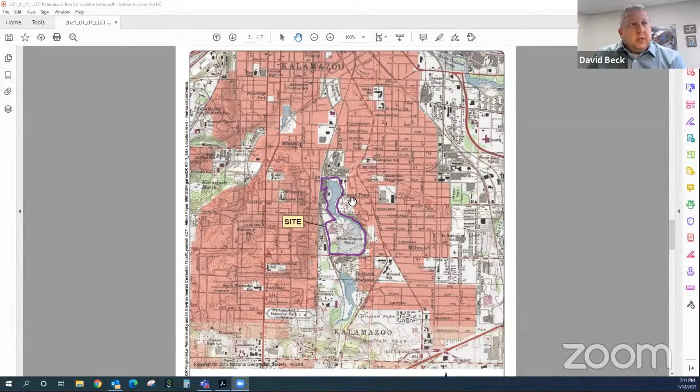So real quickly, the address that Anthony mentioned, 268 Alcott, is the old Allied paper site, just south of Alcott. There were other portions of Allied paper north of Alcott that I'm sure have been discussed in this committee before with the ongoing development on the north side. We're actually working at the old pond just south of Alcott and what's currently a landfill closer to Cork Street. This is the focus of our work area.

So I'll scroll down to the next drawing. As part of the design, we've submitted a few iterations of that to the various parties.

One of the comments we received from the city, since the city did acquire the former Panelyte site, which is outlined in orange here. The city acquired this, I believe, in 2018, maybe 2019, from the Michigan Land Bank. That acquisition was to facilitate the remedy on the property, and also for future use of the Panelyte property along with the Allied site once the remedy is complete. The expectation is that the site as a whole will be transferred to the city of Kalamazoo for their use in the future following the remedy.

As you can see, it's a large site. There's a lot to go over, but in general the project includes excavation of residual paper making materials, so paper residuals and some other soils impacted by related constituents, and those excavations will be completed in these black outline areas.

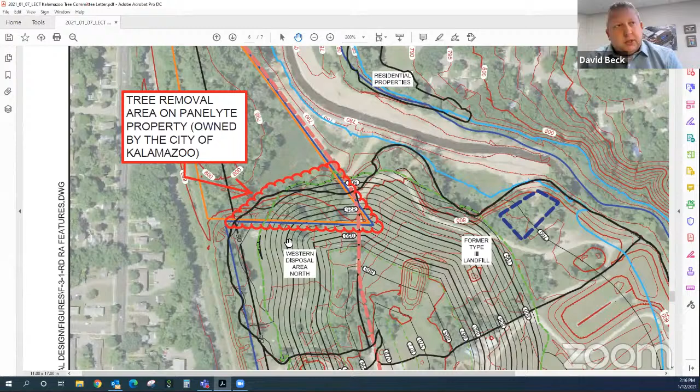We did have an arborist come out to do a tree survey, summarized in the letter. In general, they identified about 166 trees over that approximate 1 acre. Upon completion of the remedy in this area, it'll be a capped slope, which cannot accommodate trees, so it'll be revegetated with native grasses. But the project as a whole does include significant environmental restoration of the area.

I'll scroll on to the next drawing. This is the restoration plan submitted as part of the final remedial design to the agency and stakeholders in December. The most significant feature as part of the restoration is Portage Creek. Right now along Cork Street, Portage Creek is in a very narrow, steep channel, which is an urban stream at this point—it's not natural.

As part of the restoration, we're restoring Portage Creek to what more closely represents the original stream before the paper companies developed it in the late 1800s. We do have some historical documents showing the likely path of that creek was closer to this, and we've used some representative streams to identify proper meandering and such.

So as part of that, we're going to relocate this stream, which is going to help slow it down. It'll increase some storage, and you can see the dark blue area adjacent to the relocated stream - that'll be new floodplain.

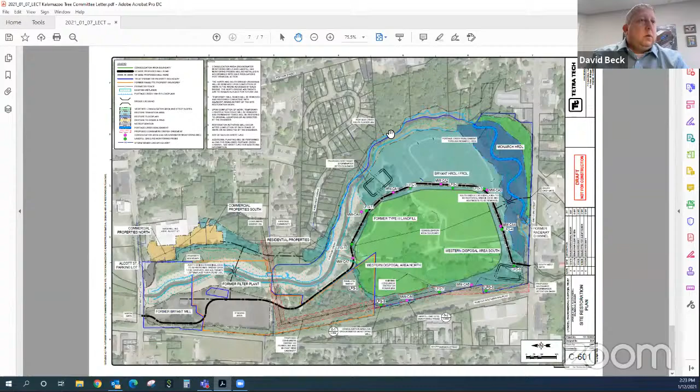The tree survey, correct? Yes, yeah. So here's that summary - by and large, it's mostly box elders that we've seen out there.

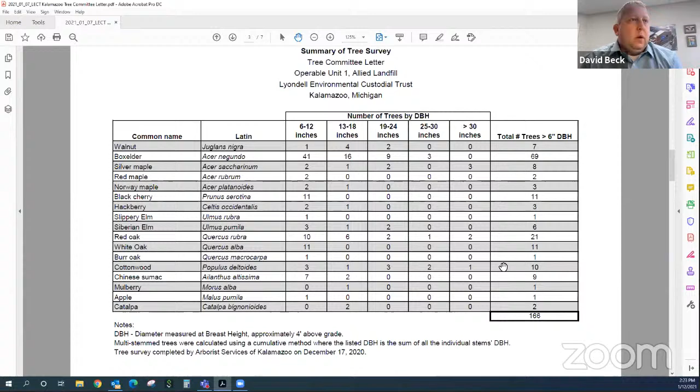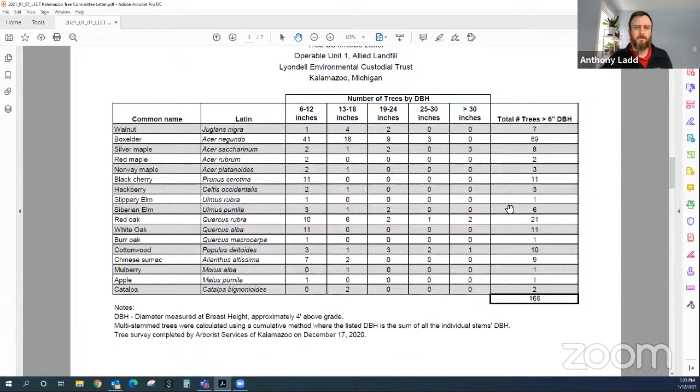And do you have any idea - I realize that's years away, but as far as the plans go, have there been any species named for the plantings by the creek? Yes, yep, right here, the following table.

Yeah, so this again is certainly subject to some change based on availability at that time. But given that these are floodplain plantings, that's going to narrow the list of what we can put in there, just because there will be essentially annual flooding of the area. So these are the expected trees we expect to put out there, and then the shrubs as well, which there'll certainly be far more of than trees.

Okay, any questions from the committee?

Do you expect the first tree removals to actually be filled with, like, the wood itself filled with heavy metals or whatever you guys are remediating?

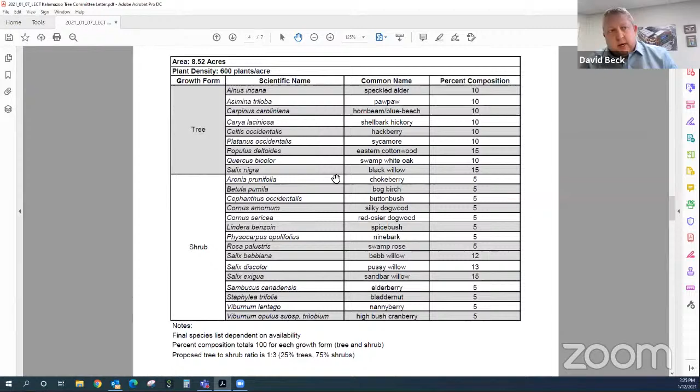So initially, in February, if approved, we're actually just going to have a tree service come out and fell the trees down to maybe about a foot above grade. They'll fell those and chip those. And then once mobilization happens in the spring and our earthwork contractor starts working in that area, they'll actually remove the stumps growing within the paper residuals. We expect those paper residuals are within the root systems of the trees.

So will those be treated as contaminated materials? Yes. Tree roots, stumps, all of the materials that come out of the excavation areas will go into the consolidation area.

Over time, does that consolidated area break down, or is it just there forever? It's there forever. It'll essentially be a repository of these materials indefinitely.

But from an aesthetic standpoint, with the cap and fill and grass, native grasses, it's not just a lone pile. No, it's going to be a large grass hill. That very well could be appealing as a sled hill in the future. Got to have snow to do that. Right.

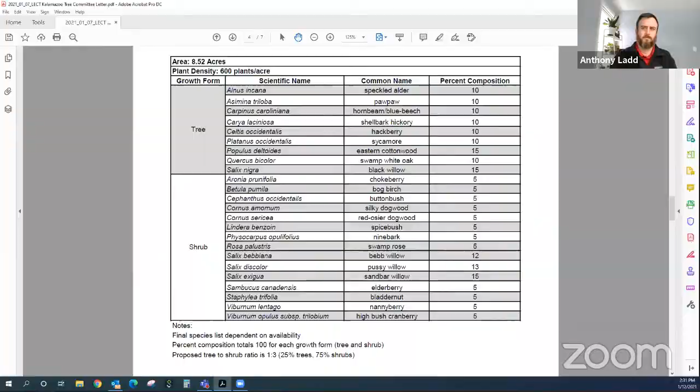Okay. So that will conclude all of our new business for today.

The remaining two items are two matters of old business. First being 400 Rose Phase 2, tree removals with AVB. This was an item that came to committee in December. There was a site plan that was presented to the site plan committee. We try to make sure that tree committee approval for any removals are part of that site plan.

So when that was presented to the site plan, was presented to the tree committee, I think we had some concerns and some comments. We wanted to take time to kind of look through this and reconvene. We did that. We had some suggestions that were made to AVB. And so now we're kind of picking this up again.

I think a couple of the requests that we had from last month were additional plantings off-site, knowing the limitations of green space that exist on the space adjacent. Some assurances for the health and well-being of the trees for an extended period of time. And then I think there were some adjustments to the species selection as well, based on a couple of the trees that were outlined.

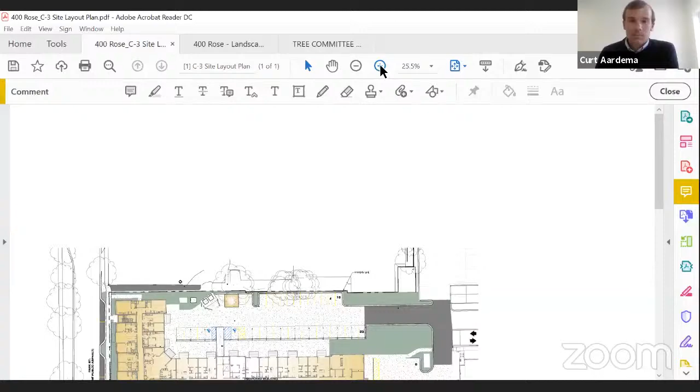So if I pull this up here and then bring this up here to the site plan, can everybody see the site plan there? Yes. Okay, great.

So as I mentioned, we've got an urban building design built out close to the street, sidewalk and street and sidewalk. We've got plantings noted here along the right of way that are intended to replace and add to what's proposed for removal. And then as we looked at the site, the surrounding area for locations to plant for additional trees, we found a couple of opportunities to the east.

So on the drawing here, it's off the edge of the drawing, but in this area, our company owns the former Knights of Columbus property, which has a couple opportunities there. And then we are going to plan to work with some of the neighbors here to the east on plantings on the south side of Cedar Street.

The north side on the east end of the block was already planted with new trees that we put in for the first building in the project, and then the one that was preserved at the corner of Rose and Cedar. And then we're looking at a few other areas on Rose Street as well to see if there's some pockets on the east side of Rose Street, which is pretty bare of trees right now.

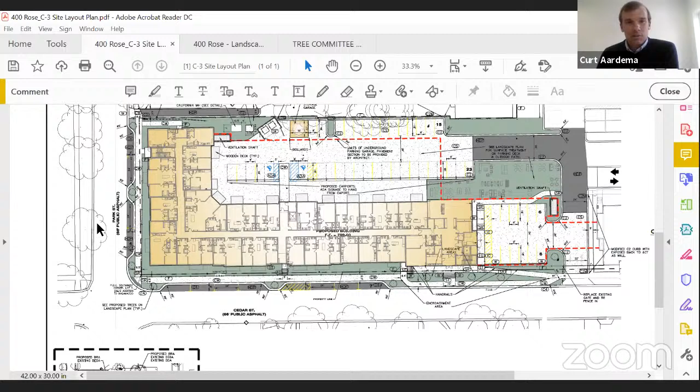It's pretty tight right of way over there. The west side of Park Street across from the project on Park is pretty well populated with some pretty mature trees. And so in consultation with our landscape architect, we thought this area was pretty full already, but we're open to ideas on where those might be planted. We've just been doing some research to see where they might go.

But if the committee wanted to make recommendations in the couple of blocks around the project, we'd be happy to listen to those and consider those. But we're certainly committed to planting the 4 additional trees as requested.

In regard to the 5-year warranty or an extended warranty on the trees, I did speak with our team and they're willing to make that commitment that the trees will remain healthy, and if they aren't, that they'll be properly replaced. So we can commit to that.

And as it relates to the replacement of, I believe it was the Callery pear tree species that was proposed, Anthony, you had given us a list of alternative options. I have given that to our landscape architect and instructed them to replace the Callery pears with those within that list of species that you provided. So that is the intent, and those will be swapped out.

I think that covers the list of the feedback that your group provided, and certainly appreciate your time both in December and today, and then the time in between, and coming up with ideas for how we might move forward.

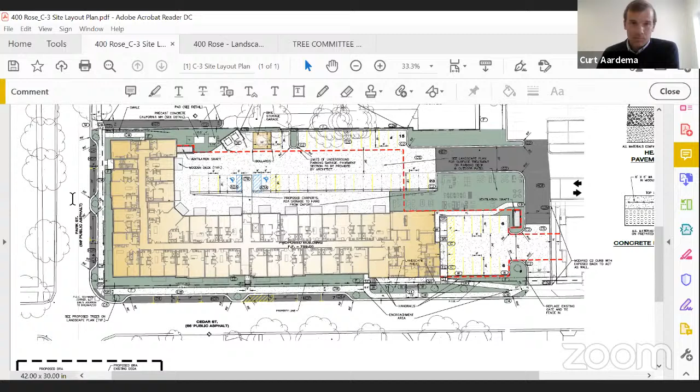As always, I appreciate everybody's collaboration to get your thoughts on this. And AVB, Curt, thank you for putting thought into this plan and coming back with something that works for everybody. Sure, thank you, and again appreciate the time and input on the project, we'll look forward to working with you as it moves forward. We're excited and hope it's a nice improvement in the area in terms of new housing opportunities and new downtown residents as well. So thank you. Thank you.

Okay, moving down the list. Here on the agenda we have the Bank Street realignment project, tree species. I hate to defer on this again, but we are still working through that. I think we're all going to be excited to see that project get started and finalize the final details. But I guess we're getting closer to time to where we can decide what kind of tree species we want to end up planting. Just to recap, I believe we plan on planting 3 additional tree species.

I can go back and check the minutes just to make sure on the number. But it's nice knowing we have that flexibility with it being either city right of way or city Parks and Recreation Department property, makes it nice to have that kind of flexibility. So as soon as we have an update on that, I will provide that, and certainly get with Brian and the committee if there's a preference for tree species. We have a lot of planting opportunities coming up, so we'll be sure to provide an update on that.